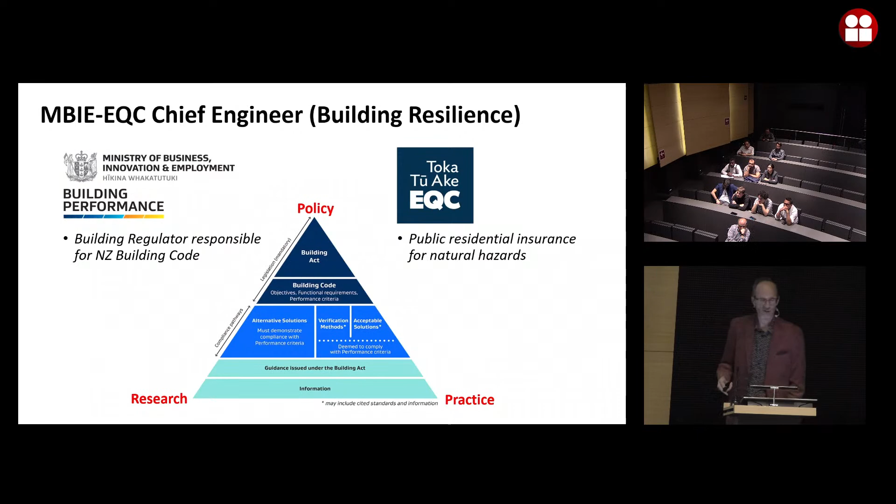In particular, I'm going to talk about the verification method piece—those standards we use all the time as engineers—and where I see those going in the future, as a way of dreaming about where New Zealand might go. But I must emphasize these are just the crazy musings of a professor, not New Zealand government policy. Might be someday, but at current time these are just my ideas I want to share with you.

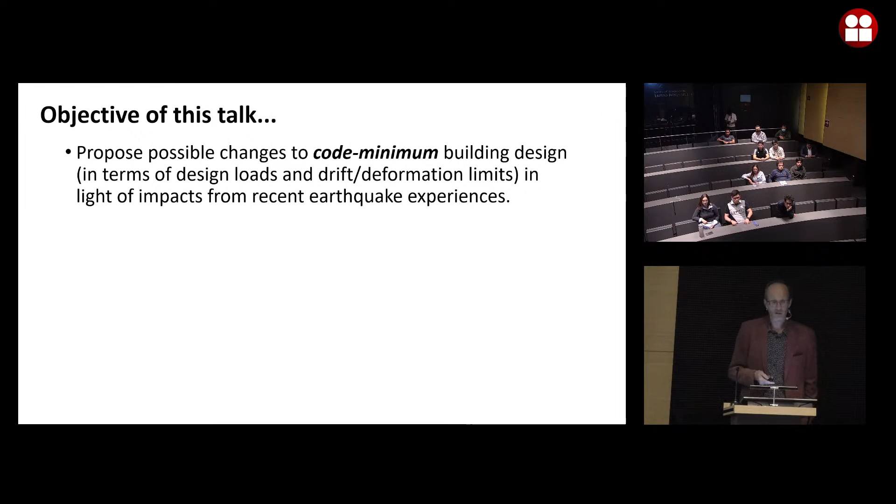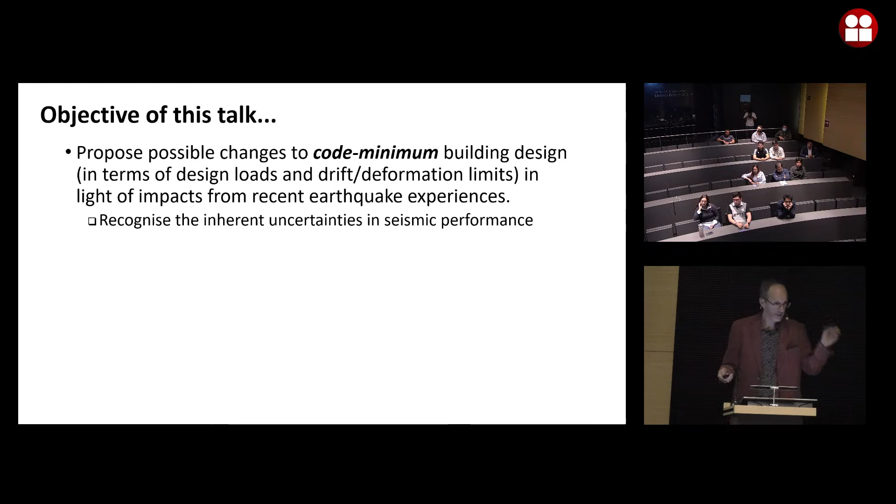In developing these possible changes, I want to make sure we think about a few things. First, we need to recognize the inherent uncertainties in seismic performance—uncertainties in the earthquake, uncertainties in the performance of the building, uncertainties in our ability to predict that performance. That's going to be a critical thread I want to draw throughout this.

Even though those uncertainties make it complex, I want the implementation to be as simple as possible. Otherwise, it's not going to get into the code, right? So I want it to be as simple as possible, but no simpler, because we're dealing with a complex phenomenon of the performance of buildings to earthquakes. We need to recognize that, so you need to make that balance.

And I want this to actually be a relatively small increment of change. You might say to me, well, you have an opportunity to dream big—why are you making it small? Well, I think a small increment of change has the greatest chance of actually being implemented, right?

And so if we can still have positive impact and significant impact, but with a small increment of change in how we design buildings, that to me is going to be a strong argument for the change. And finally, I want to demonstrate to you that I think many modern buildings today are already repairable after a design level earthquake. I'll try to demonstrate this with a couple of case studies. But if this is true, that really gets us a long way to saying, yes, we can design repairable buildings.

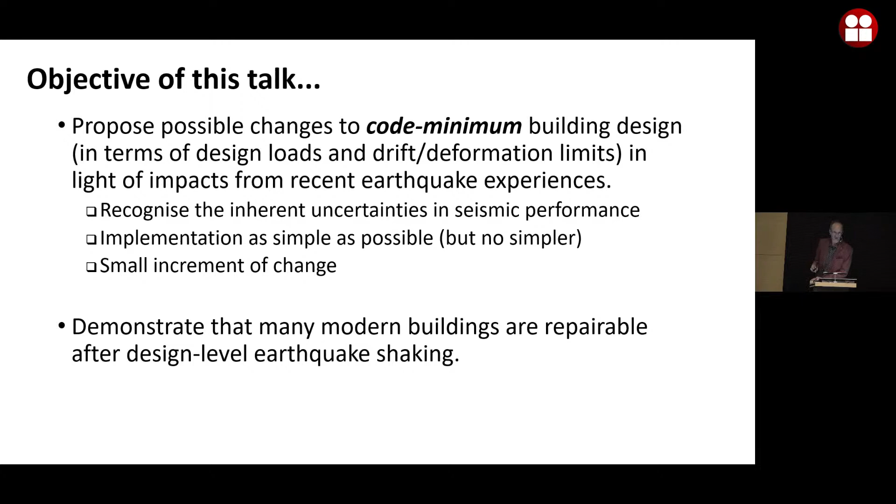So first, let's think about what I'm going to call the building design improvement cycle. In the good old days, this would essentially be triggered by an earthquake happening, and then we go out and look at the performance of these buildings, probably spending most of our time focused on the structure. Non-structural elements may be damaged, but our focus was on the structure. A lot of this learning, by the way, came through the EERI program, Learning from Earthquakes.

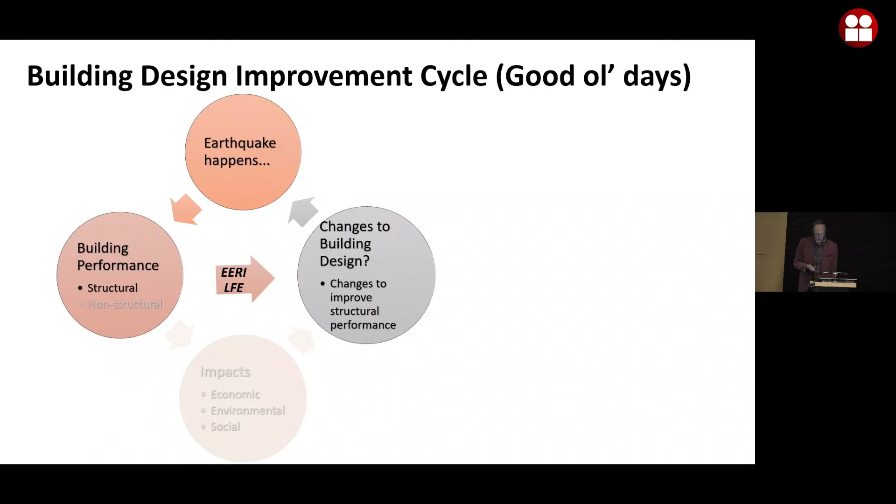So hats off to that program for all the learning that has gone on. And after Learning from Earthquakes reports back, we ask ourselves, okay, what sort of changes do we need to make in the design of our buildings to improve that structural performance that we've observed? And it's really out of that process that our ductility-based design principles of today were born. A lot of these were embodied in the key document ATC3, which is really the foundation of most modern seismic design codes around the world.

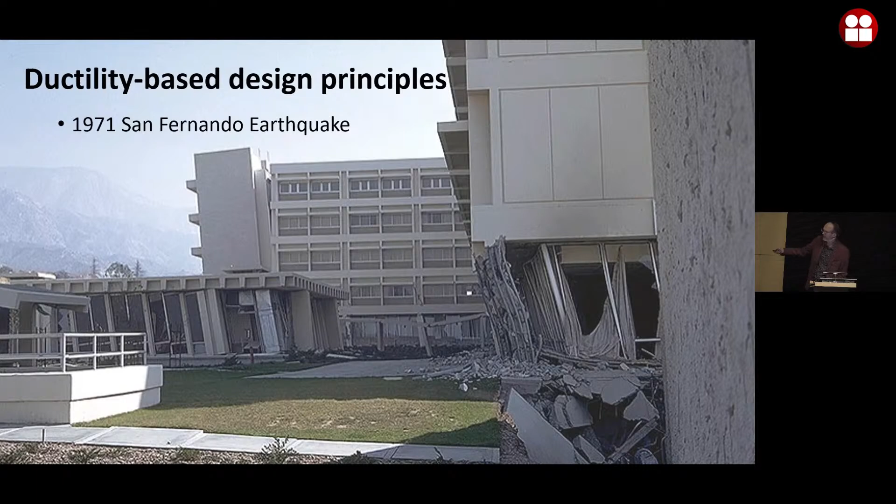And I think the poster child for this was the San Fernando earthquake that affected the Los Angeles area. This, of course, being Olive View Hospital, which opened just shortly before the earthquake. And one looks at damage like this and says, oh, look at that soft story. Wouldn't it have been great if we could have spread that inelasticity up the building? Also look at the damage to the columns and say, oh, we can actually design for deformation capacity if we confine those columns versus leaving them unconfined like the one on the left.

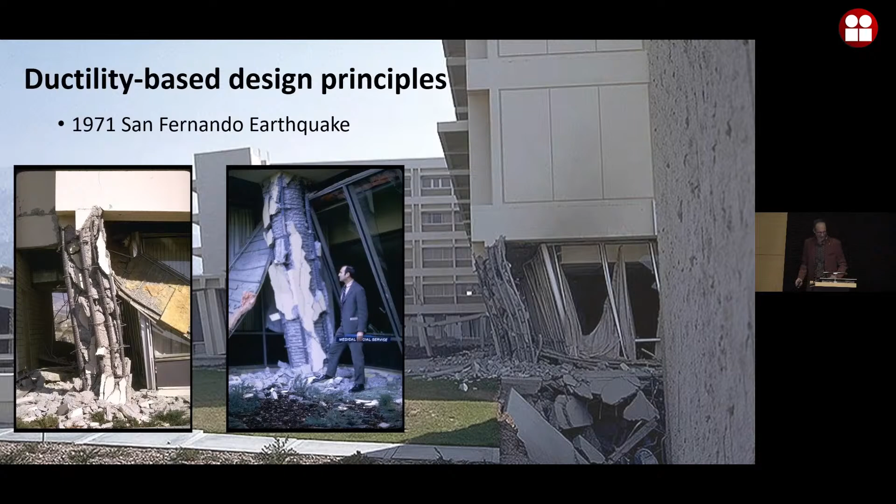It also shows us how health and safety has changed over the years. We wouldn't be approaching a building like that in such condition today. Well, nowadays, I think we recognize that things are a little bit more complex.

And so our building design improvement cycle needs to expand a bit, right? We look at the performance and we need to consider the performance of the non-structural system. And really what becomes important are the bigger impacts. I'm going to classify these into economic, environmental, and social. And I'll come back to those classifications in a second.

And again, EERI LFE has been central to this thought process. But what we asked ourselves afterwards, instead of how can we change the structural performance, we asked ourselves, what changes are necessary to manage future impacts from future earthquakes? So essentially, this is the process I want to go through a little bit here today. To start off with, let's talk a little bit about what impacts have been observed from recent events. And then we'll talk about what possible design changes we might make to manage those impacts. Notice I say manage, not eliminate, because eliminate would probably be unachievable in most cases, but manage.

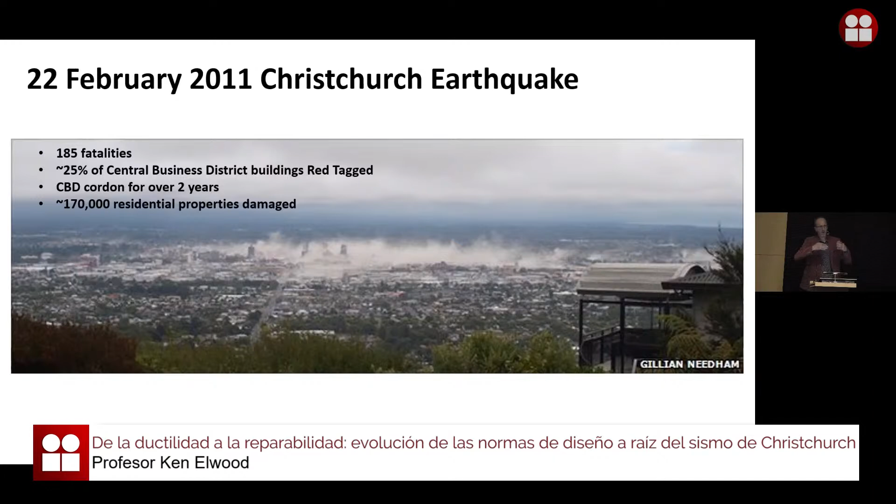So this is a city of 400,000 - it's a small town. So that impact on the residential properties is massive, considering the size of the city. But what I want to focus on are more the indirect impacts, the wider impacts.

I'd like to classify these as being economic, environmental, or social. All of these are different impacts, and some examples are shown here. Building performance has some relationship with all of these - some more than others, but some.

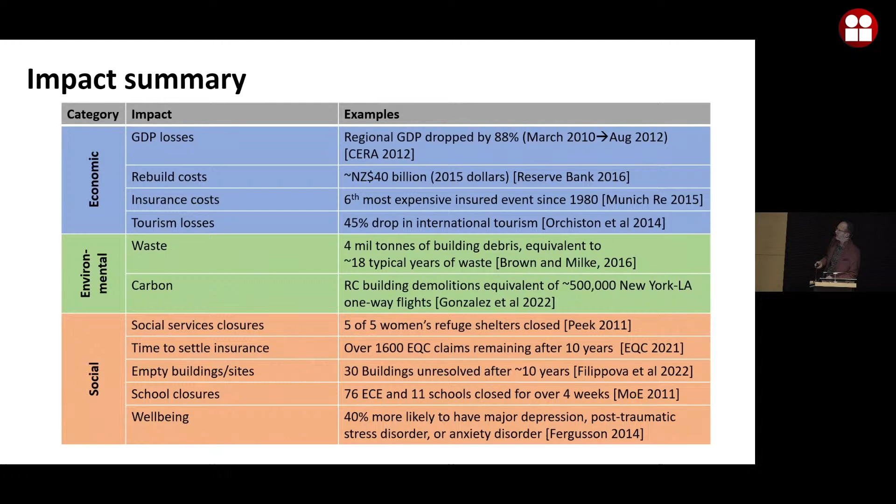Instead of reading through these, I'm going to just pull out a few to show you in a little bit more detail on the subsequent slides. So first, let's look at economic.

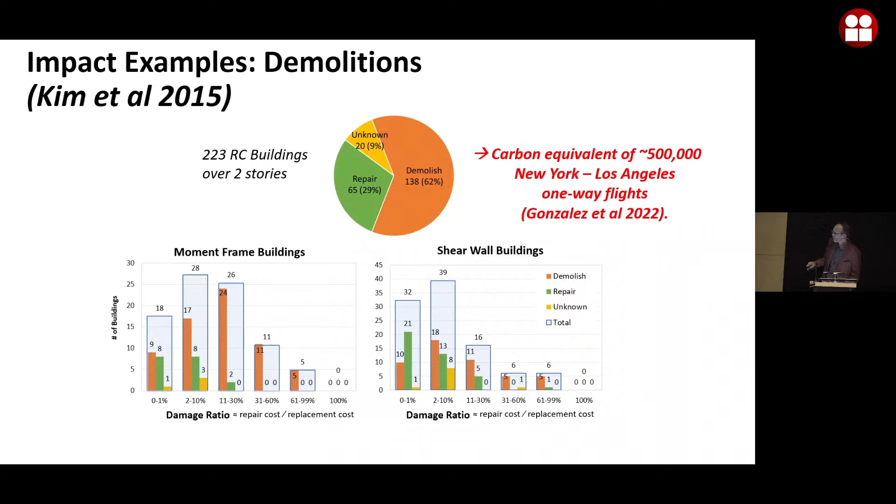Well, actually, the decisions around these demolitions is quite complex. This was a master's student of mine who thought through what are the different things influencing the outcomes on these buildings. Essentially, it's influenced not only by the earthquake itself, but the condition of the building prior to the earthquake, the economics of the building for the owner prior to the earthquake, and then the condition of the overall neighborhood after the earthquake, and whether or not the owner really wanted to be back in that area, whether you were in a cordon or not, and that either made it easier or harder to rebuild.

And then you go into what I call this vortex of complexity. There's lots of stuff going on here, and I could give you a whole other hour lecture just on these factors. But a really important piece in New Zealand was insurance. New Zealand is heavily insured. The vast majority of these buildings that were demolished in Christchurch had good insurance, and that may have contributed to that decision to demolish. But like I said, that's a whole other hour lecture.

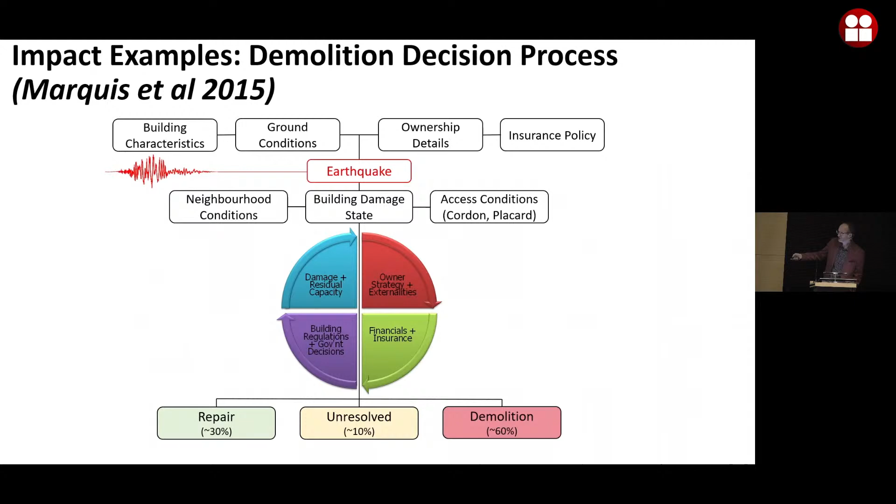What I want to emphasize here is, in addition to this large number of demolitions, we still have a good number of unresolved cases. In fact, 5 years after the earthquake, the local newspaper identified what they called 45 barrier sites. These were sites that were barriers to the development, to the redevelopment, the revitalization of the city.

And speaking of social impacts, there was a very interesting survey done for the years following the earthquake, where they asked people to reflect on what was impacting their everyday lives. They gave them a whole list of questions: does this impact your life? And rated this as a slight, moderate, or major negative impact, or none at all.

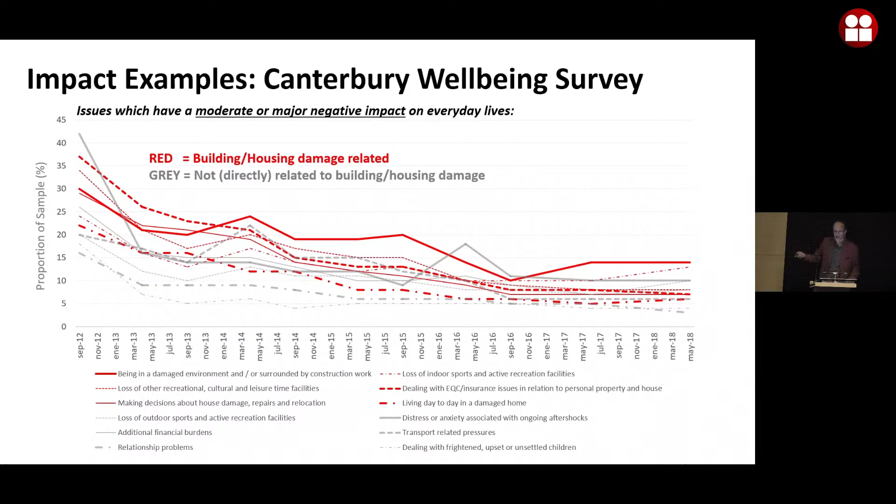Another form of well-being impact were the widespread injuries. We often think about, in design, we think about life safety, right? But actually, injuries are also a direct impact of the earthquake and impact people's lives and kind of ongoing well-being issues for the community. So this was a study done by Horspool where they collected a really amazing data set on injuries after the earthquake.

And from all different sources, you can see that some of these are just moderate and can be dealt with at a community clinic, but many of them are serious or critical cases. Those serious or critical cases tended to be concentrated, of course, in structural impacts. So this reinforces the fact that we need to focus our efforts on the structural performance to protect people against those serious injuries. But very widespread moderate injuries across a lot of different causes.

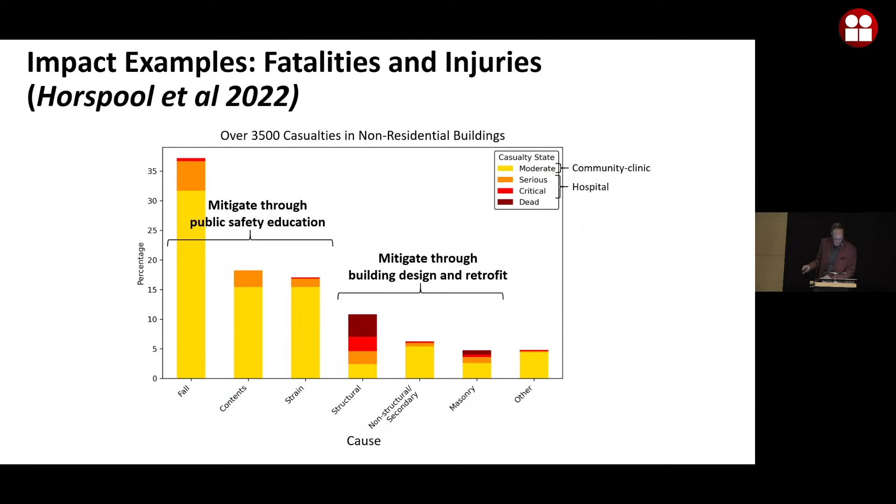I've just tried to give you a snapshot of these various different impacts, and I've shown you that they're complex. It's never from just one thing. So just showing you some examples here and what are sort of the contributing factors to that impact. While there are many contributing factors, building damage does play a role in each and every one. And so now at this point, I want to change gears and focus on how we might manage that building damage and then how that could help improve or manage, in turn, the impacts.

So to do this, let me turn to the New Zealand Building Code. I'm putting this in the context of the New Zealand Building Code, but it could very well be done according to any jurisdiction, which would have similar provisions. The most common of these provisions, and that appears ubiquitous around the world, is to protect people from harm, from injury. And in the case here, it says injury and not fatality. That's because it's intended to protect people from injury, both fatal and non-fatal.

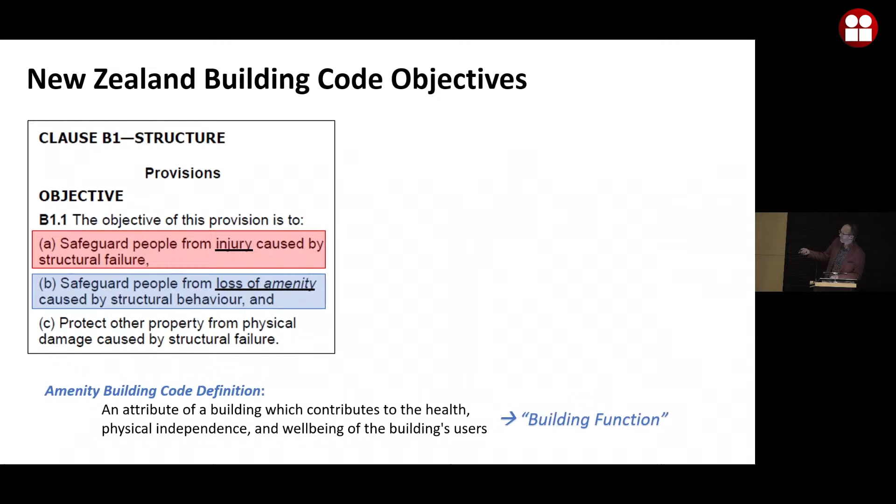Now, in New Zealand, we try to achieve these objectives through design targets, where we design for an ultimate limit state and a serviceability limit state. That ultimate limit state is probably what you're used to designing for here. In the case of New Zealand, this is designing for a 1 in 500 year ground shaking.

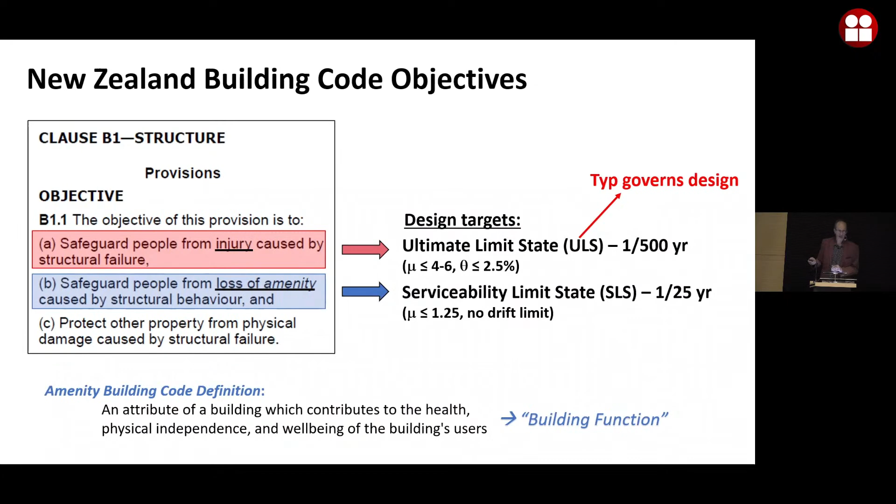For serviceability limit state, it's a much lower ground motion, only a 1 in 25 year ground motion. So that's a pretty small earthquake. We'll come back and talk about whether these are appropriate in a moment. While you have these two, the ULS, ultimate limit state, really governs the design of most buildings. The serviceability limit state has limited impact on most ordinary buildings. The only thing it does to a large degree is control the amount of ductility we're allowed to consider in our design.

So how do we relate these design targets and objectives with the impacts we were talking about? On the left side, I'm showing the impacts from the Christchurch earthquake, and at the top, the building code objectives. It's these design targets of SLS that give us the amenity and protect against some of the damage seen. Then we've got ULS protecting from injury and fatality, protecting against big losses, serious injuries and fatalities. But there seems to be a gap here.

These issues around waste, carbon costs, empty buildings are really not addressed. That suggests maybe we need another building code objective, something related to a climate change related objective. I'm going to suggest that maybe that is an objective around enabling repair. So for the rest of the talk, I'll go through each of these three and try to suggest ways in which we can assess how we design for each of these design targets, including enabling repair.

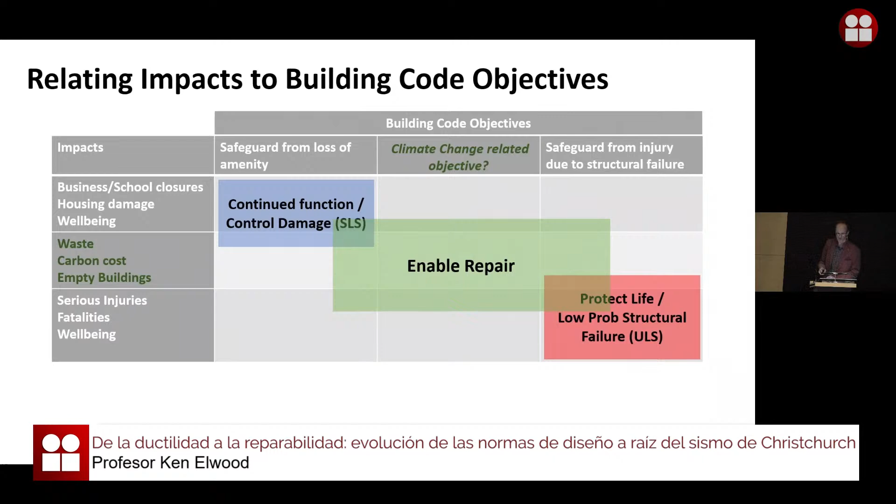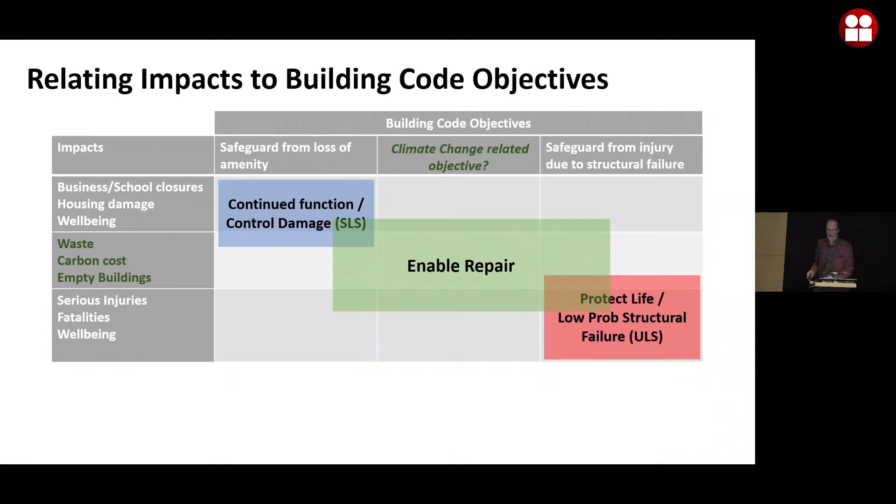I'm going to start at the most familiar space, the ULS, then go up to talk about SLS, and end with enabling repair. I'm going to focus on what design loads and drift limits or deformation limits we might need for each of these. But again, there are lots of other aspects of the design process that are as critical, if not more, than these particular limits. But this is a start.

Before I do, I want to talk a little bit about risk-targeted concepts, because I'll use this concept a few times in the next several slides. The traditional approach is that seismologists give us a hazard curve for our location, and this tells us the level of shaking for different probabilities.

Typically in New Zealand, we use 1 in 500 as our annual exceedance probability. So you read across at 1 in 500, and that gives you your design SA. But what if you have another location with a different hazard curve, but the same value at 1 in 500? Do you still use that same design SA? Is that appropriate? Are we missing something about the rest of the curve? Maybe we should consider that.

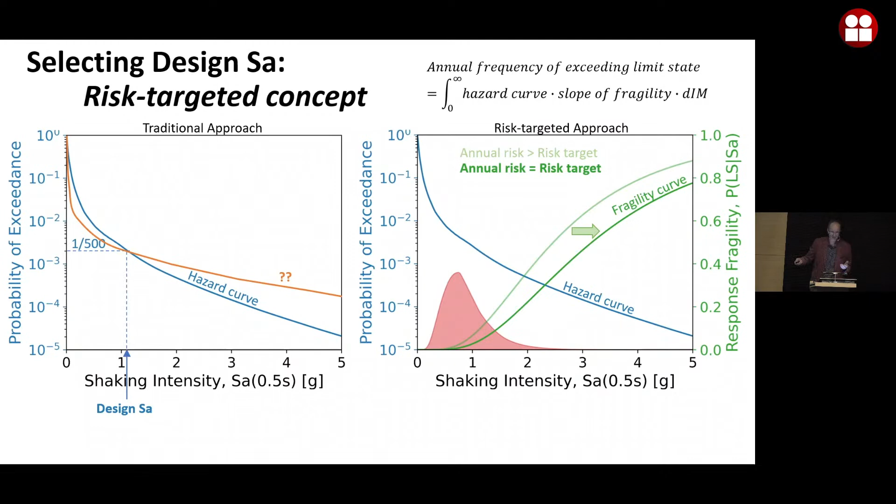Now the question is, what value do you design for? You don't design for the fragility curve, you have to design for a particular value. Here in the US, it's traditional to say you design for the 10% value, and that gives you your SA to design for.

Equivalent to that, you could say we believe we have some collapse margin ratio for our buildings, a ratio between the median value on that fragility and the value I design at. So I can read from that median value back to the design value, and that's the value I choose and put into the standard and design for. So this is the basic risk-targeted concept, and it's implemented in the U.S. in ASCE 7 to get their risk-targeted MCE values. We're considering this concept in New Zealand, but taking a slightly different approach.

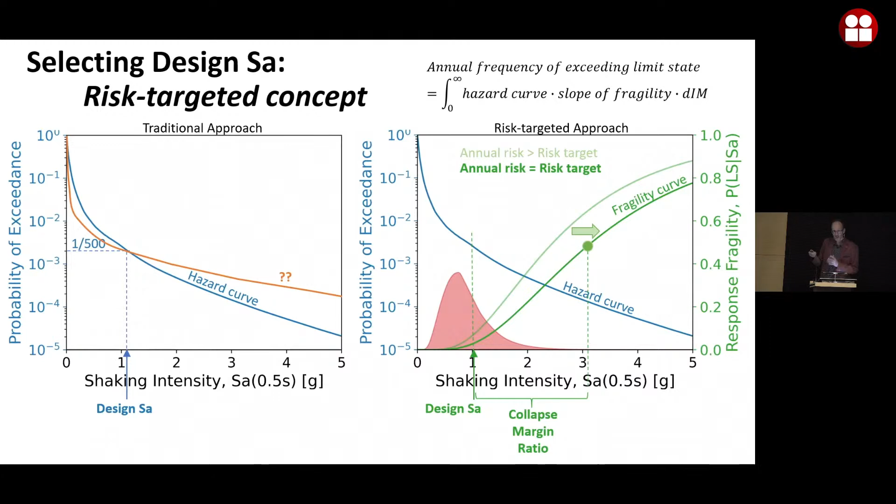First of all, we ask ourselves, do we really have a single risk target? Defining what is tolerable or acceptable risk is incredibly difficult because it's a societal tolerance. So really we can only define a range if we're lucky. And the risk we're really interested in is protecting life.

So we define an annual individual fatality risk of somewhere between 10 to the minus 6 and 10 to the minus 5. That translates to collapse risks up to about 0.5% in 50 years, which is considerably smaller than what's used in the IBC in the US. But in the New Zealand context, this feels honestly too high. It doesn't really feel like an acceptable collapse risk here.

Using this fatality risk has the advantage that we can compare it to other life risks. This table shows life risk thresholds used in different sectors in New Zealand, largely from land use planning. The first thing you see is there's no clear boundary—it varies all over the place. These are different sectors that each have their own tolerance levels identified.

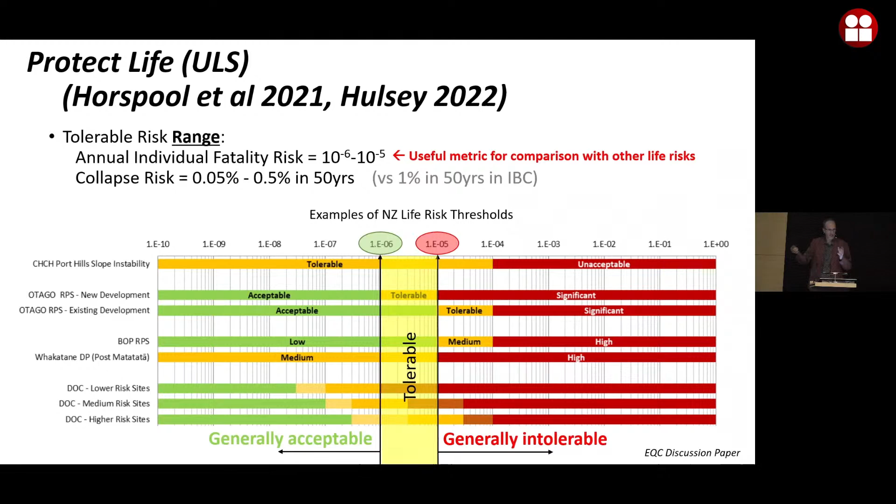But if you look at these, particularly those for new development, we tend to see a tolerable range, where below that range is generally acceptable and above it is intolerable. So maybe this is where we expect our building code to fall, to define that tolerable range. This is how we chose 10 to the minus 5 and 10 to the minus 6—by looking at what values are used elsewhere.

And then we went back to the process I described earlier and asked: what if we take that 1 in 500 year hazard and consider the range of possible fragility curves that could result from a new building designed according to our code? It's not just one fragility, it's a range. When we consider that range and apply the 1 in 500 year hazard, we get this distribution of risk.

It's a different distribution of risk depending on where you are—this shows four cities in New Zealand. It also depends on site class and building period, but I'm just showing one example here. If I overlay the tolerable range from the previous slide, you see that we actually tend to fall within that tolerable range. So we concluded the 1 in 500 still seems to work fine for us.

We've used a risk-informed approach now rather than a risk-targeted approach—using risk to inform our decision that 1 in 500 is our design ground motion for life safety. So that's all about life safety, about protecting life. Now let's move to SLS, the serviceability limit state, and talk about protecting function, maintaining function.

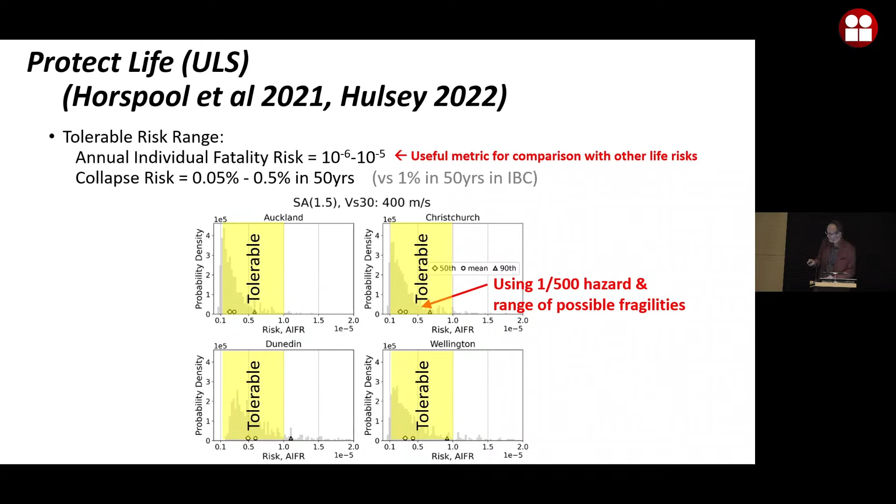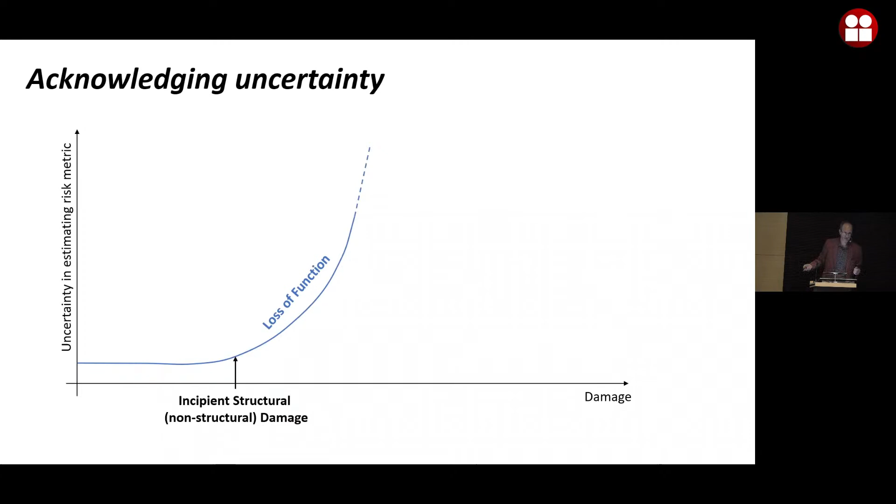So we don't necessarily want to directly target loss of function because there's all kinds of uncertainty involved. Instead, we're going to target incipient damage. I'll start by talking about structural damage, and then non-structural damage. We're going to use incipient damage as a surrogate for high confidence in continued function. We're not actually estimating whether function continues, but using incipient damage gives us confidence that we'll still be able to continue function.

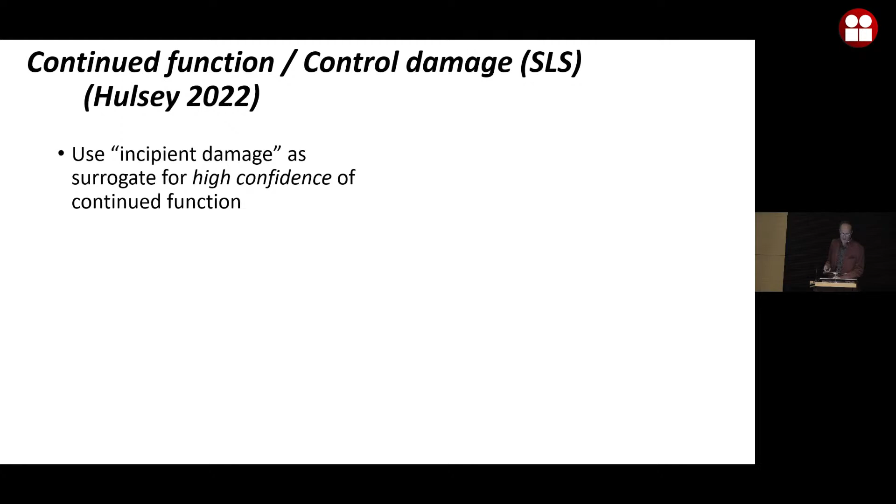We're going to define that based on remaining essentially elastic, so a ductility of less than 1.25. And we're going to choose a risk target of 50% probability of exceeding that in 50 years. You say 50%, that's pretty high. But we are just talking about damage, not life safety in this case. If we get it wrong, we get a little bit more damage, that's not the end of the world. So maybe using a 50% value is okay, but we could revisit that. If you didn't like 50, we could put something else in there.

So we do the same process as before, but now we have a fragility that represents essentially elastic. Again, we can integrate these two and see, oh, actually, that annual risk is too high. And we can shift that fragility over and find until that risk gets down to our target level. And then we can read off the design value for that serviceability limit state.

It turns out that happens to be about a 1 in 500 year ground motion. Sorry, 1 in 50 year ground motion. Remember before, our current standard uses a 1 in 25 year ground motion. So this is quite a bit more rare, a bit bigger event. But this number actually tends to hold regardless of the location in New Zealand, so that's convenient. We can just design for that 1 in 50 ground motion.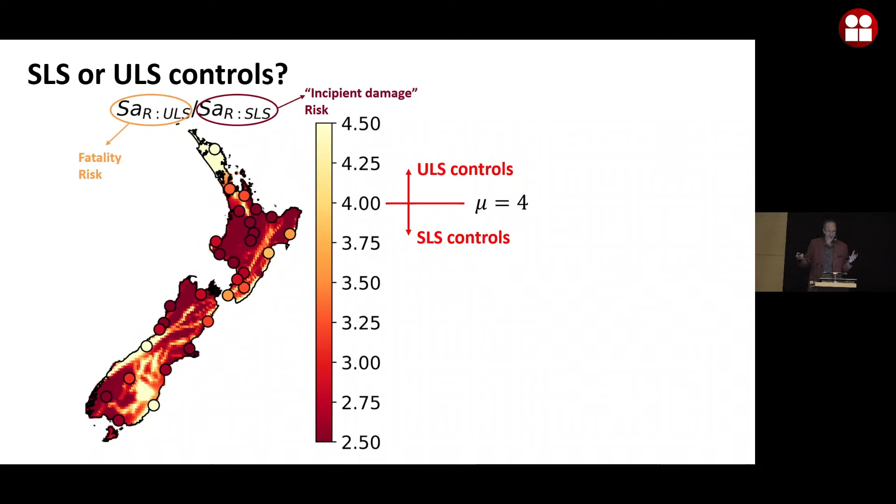And that's quite different than what we have right now. Remember I said that the ULS, the ultimate, typically governs. But this is actually consistent with where the industry seems to be going. There's been a lot of talk at recent conferences in New Zealand about the need to consider designing at service level and checking performance at ultimate, that this would maybe deal with some of the issues from Christchurch. So this study has sort of supported that outcome. And it's interesting now to reflect on other countries' experiences. Here I want to reflect on Japan, because in Japan, they do design for essentially a service level and then check for ultimate. Whereas in New Zealand, we design for the ULS currently and check SLS.

So I'm comparing two earthquakes here. The black one was Christchurch. The red one is the Kumamoto earthquake in Japan in 2016. You can see it's quite a considerably strong earthquake, larger than Christchurch in most cases. But if you look over here on the right-hand side, the red ones is all Kumamoto, and you can see most of them have no damage at all.

And sorry, these are all the modern, what I'm calling modern concrete buildings, so past the code where capacity design and things like that were implemented into the code. And while the buildings in Christchurch, sure, they met life safety, we saw very few in the severe and collapse categories. We did see a lot here in the damaged category. So there's something suggesting that the approach in Japan maybe is contributing to these better outcomes.

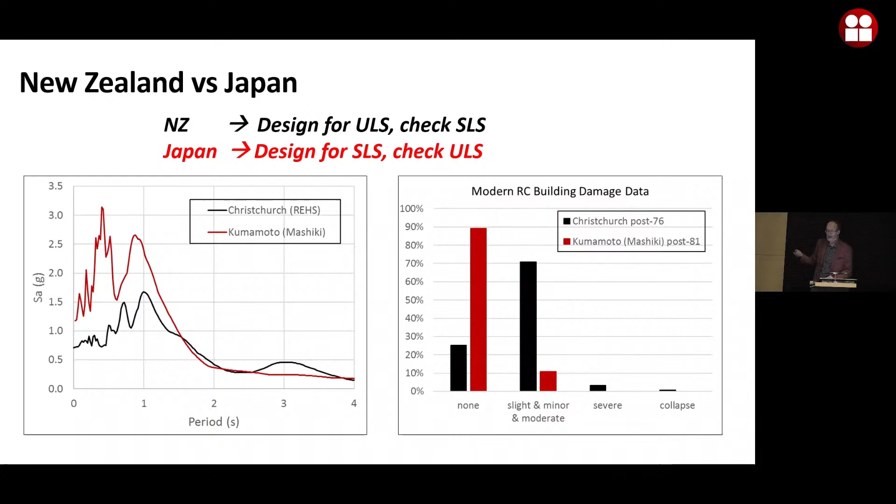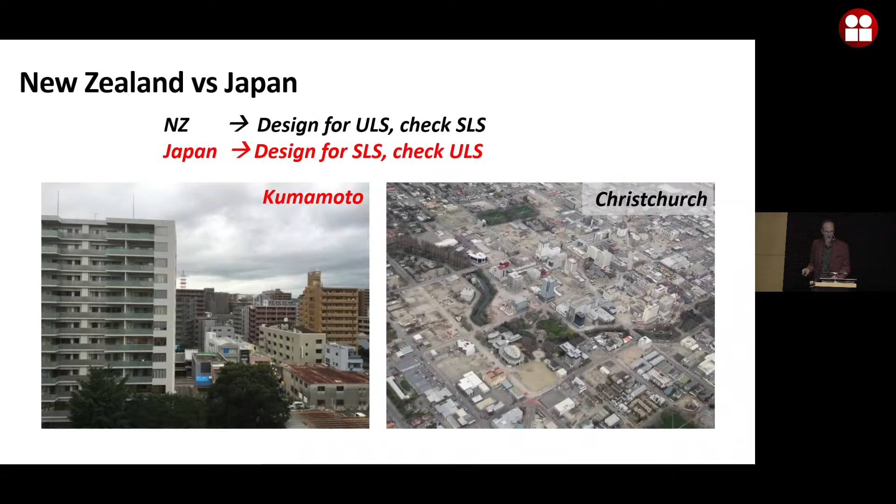Since this picture was taken, many of the buildings in this picture have subsequently been demolished. So a big difference in terms of outcomes. Is it all because of this? Surely not, there's more to it than that. But it seems to suggest that this change in approach might help us in changing the outcomes.

All we've been talking about so far is strength. And in the words of Hardy Cross, professor from the University of Illinois, strength is essential but otherwise unimportant. What really matters is drift. So now let's think about this continued function aspect, but in terms of the drift.

What sort of drift limits should we apply for drift-sensitive non-structural components to enable continued function? To do this, I'm going to consider partition walls, and I could use different damage states. I'm going to use DS2, essentially the damage state at which you'd really start to do repairs. Damage state 1 isn't too bad—many of us have partitions in our homes with a little messiness, so you probably wouldn't even do anything with a DS1. So DS2 you would surely repair.

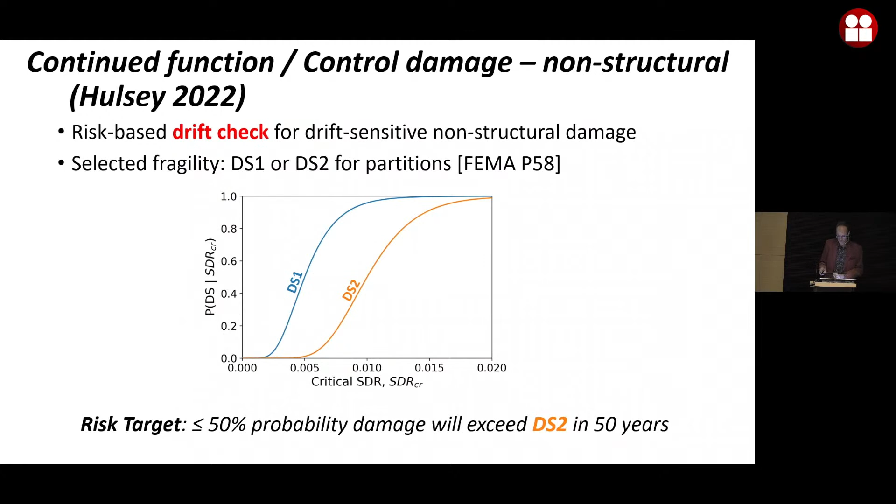So we want to set a risk target for this, and again I'm going to use that 50% limit—50% probability of damage exceeding a DS2 in 50 years. And how do we do this? Well, we now need something in terms of drift, not acceleration. But typically our hazard curves are given to us in terms of acceleration, so we need to convert that.

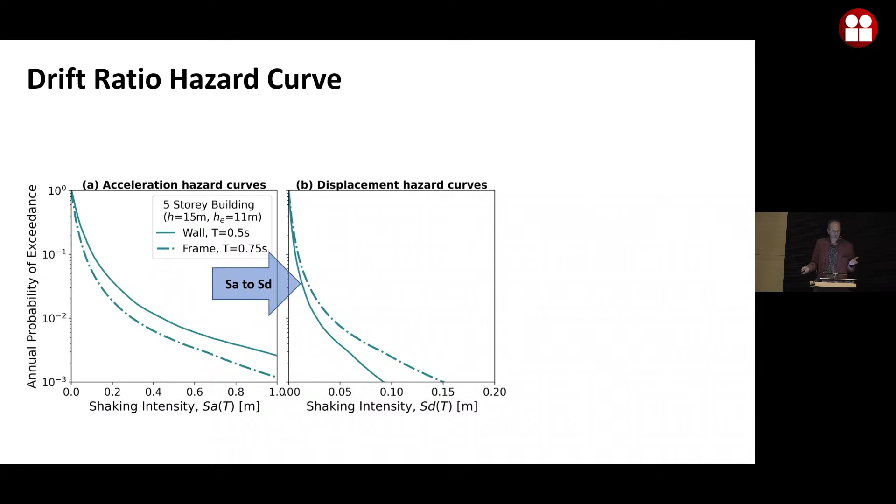It's easy enough to convert SA to SD, spectral displacement. Then we need to convert that spectral displacement to an interstory drift, a maximum story drift over the height of the building, by assuming a deflected profile based on whether it's a wall building or a frame building. But that's easy enough—we can convert those hazard curves into drift hazard curves. And then we need to integrate that drift hazard curve with the partition fragility.

And the first time we do that, we end up getting a higher risk than we wanted, so we got to do something about that. But we can't change the partition fragility—it is what it is, unless you choose a low damage partition. But I want to just use your run-of-the-mill partition; I don't want to pay for a special one. So maybe I need to stiffen my structure to reduce the drifts. You can do that, but that's going to shift your hazard curve as you stiffen the structure, and you stiffen it until you meet that target.

Well, what this shows us—and we can do this for several locations—is that we consistently end up getting, at the service level ground motion of 50 years, a drift limit of about 0.7%. If we had done this for DS1, we would have gotten 0.3%.

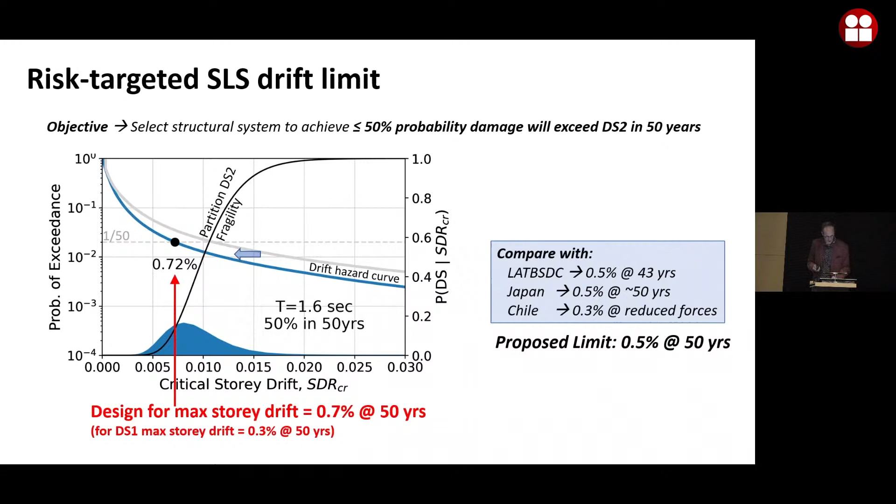So using that as a drift target to control damage to the drift-sensitive non-structural systems. Okay, so now we've got means of dealing with protecting life and structural failure, and means of controlling damage and continuing function. Now let's talk about the really new part, which is enabling repair.

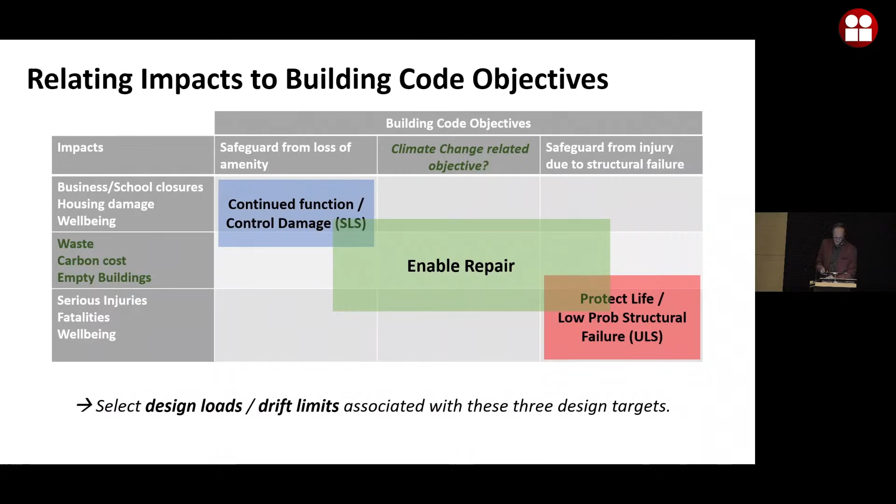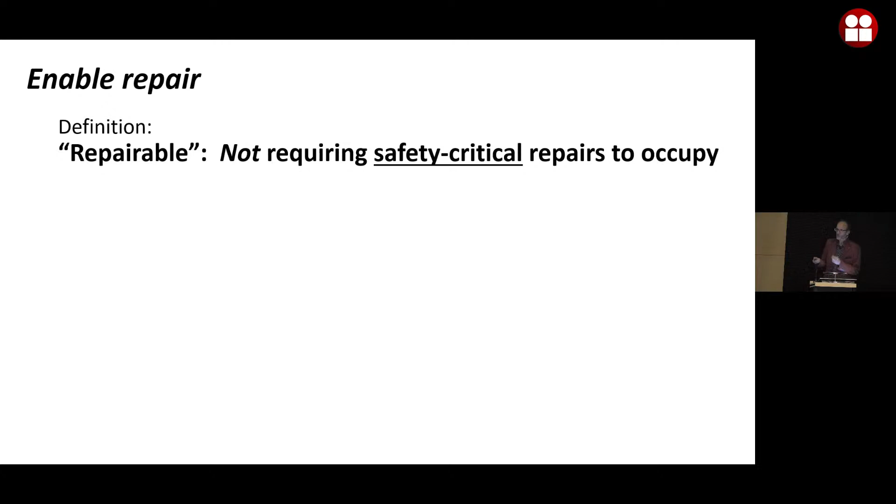To do this, the first thing I need to do is give you a definition, because really anything is repairable if you throw enough money at it. So the definition I'm going to use is that it's not requiring safety critical repairs to occupy the building post-event. What do I mean by safety critical? I mean a safety critical repair is one needed to restore either the strength or the deformation capacity of the building and its components. So that's the definition I'm going to use.

I also want to identify that you can still have a fair bit of damage with this definition, so you're unlikely to be fully functional. But by making sure you don't have any safety critical damage, you'd be safe to shelter in place. And that's why we say it's safe to occupy. That's really critical so people have a place to be, a shelter after an event.

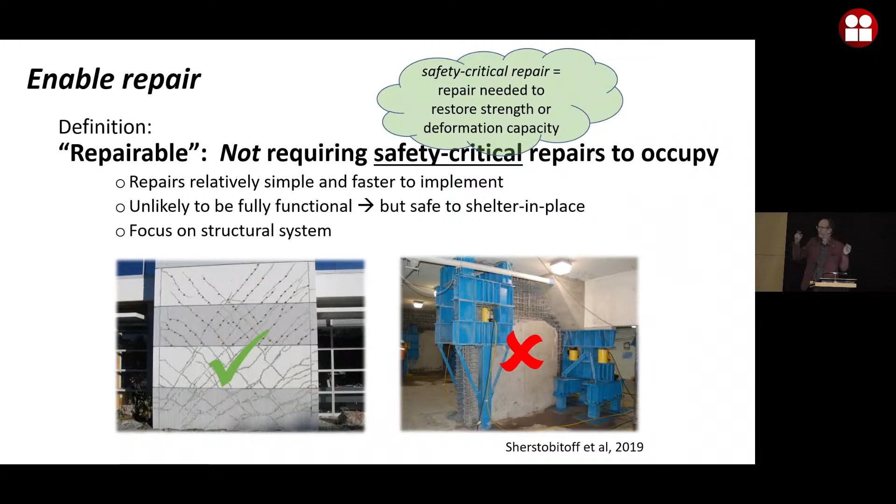I'm going to focus here on the structural system. I'll come back and talk very briefly about non-structural, but there's a whole piece of work that's needed around repairability in non-structural systems.

So to do this, I want to propose some component-based repairability limits—repairability limits for our components: our beams, our walls, our columns.

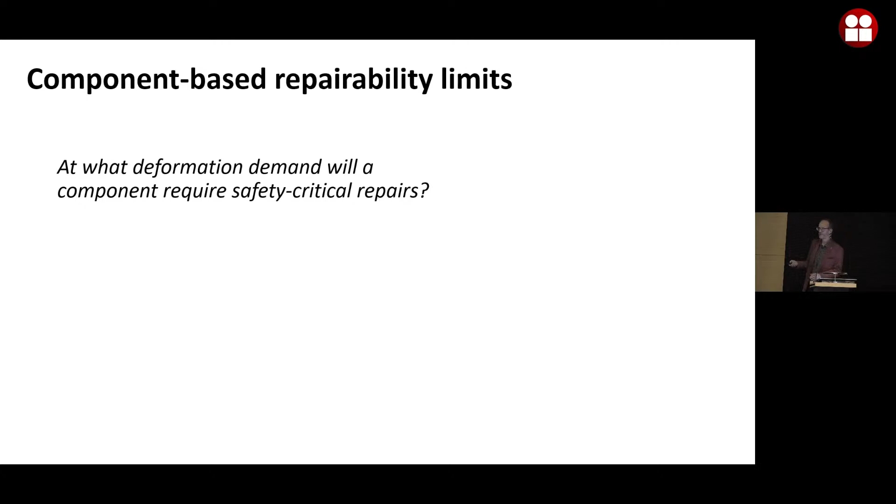So essentially I'm asking myself, at what deformation demand will a component require a safety critical repair? Or, put another way, when do the prior cycles from that damaging earthquake influence the strength or deformation capacity of the component? With these questions in mind, let's look at some test data.

For me, that's the first place to go to think about any of these things. There was a great set of tests done by Kawashima and Koyama back in the 1980s, where they constructed identical bridge columns and subjected them to different loading protocols.

One loading protocol had 10 cycles at each drift level, and the other had 3 cycles at each drift level. What you see is that up until you reach about the peak in the response, the two were very, very similar—even in their damage pattern.

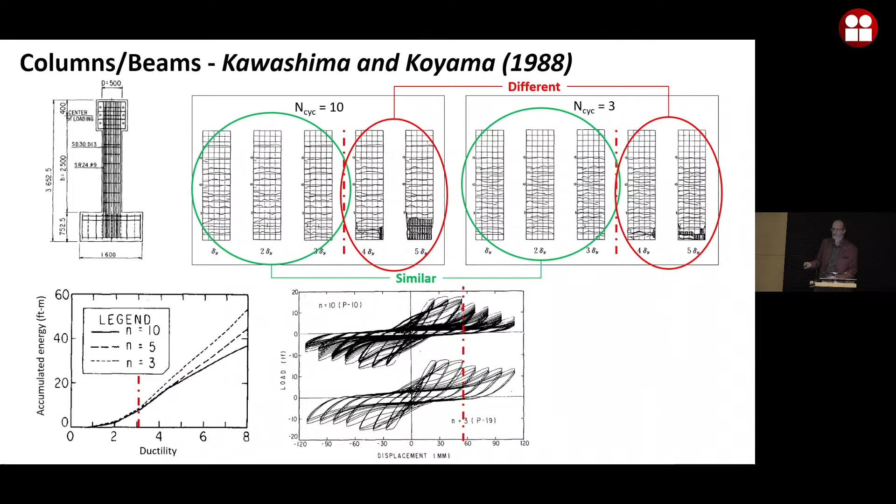But once we got past that peak, things started to get different in the damage pattern, and it dropped off more quickly with the 10 cycles. Really, the number of cycles up until that peak did not influence the performance we were seeing. So the number of cycles prior to the peak didn't matter to the performance afterwards.

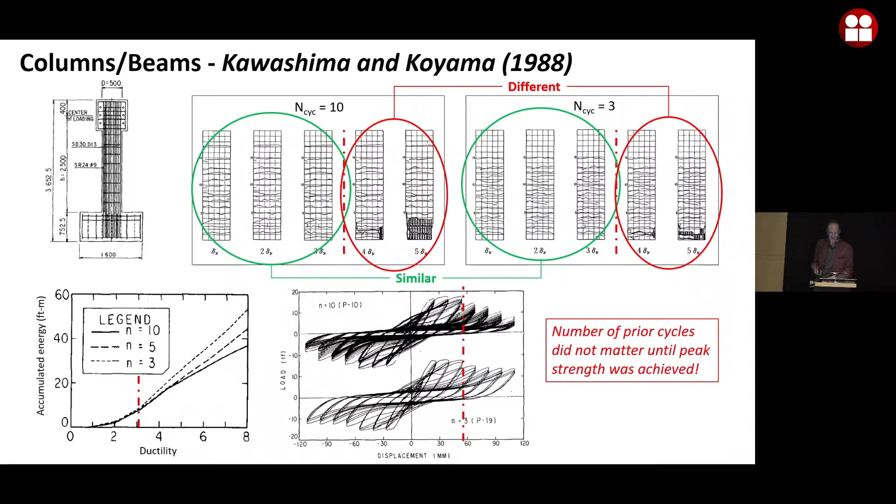How about walls? I had a graduate student at the University of Auckland who wanted to explore this for walls, so he did a few tests—one where he applied a standard cyclic protocol, and another where he first put it through an earthquake recorded in Chile, which had lots of cycles, and then put it through that standard cyclic protocol.

Essentially, the peak in the response, or the onset of bar buckling, was unaffected by the input of that prior earthquake. So the number of prior cycles did not matter until bar buckling—essentially the peak strength—was achieved.

Then, of course, my student wanted to prove me wrong and decided to do a test with 10 big cycles at 1.5% prior to the standard cyclic protocol. That resulted in a bit of a change and some degradation at an earlier drift. But this simply emphasizes the uncertainty in the outcome and the need to account for those uncertainties in our process. Also recognize this is a lot of cycles at 1.5%, a pretty large drift for a wall.

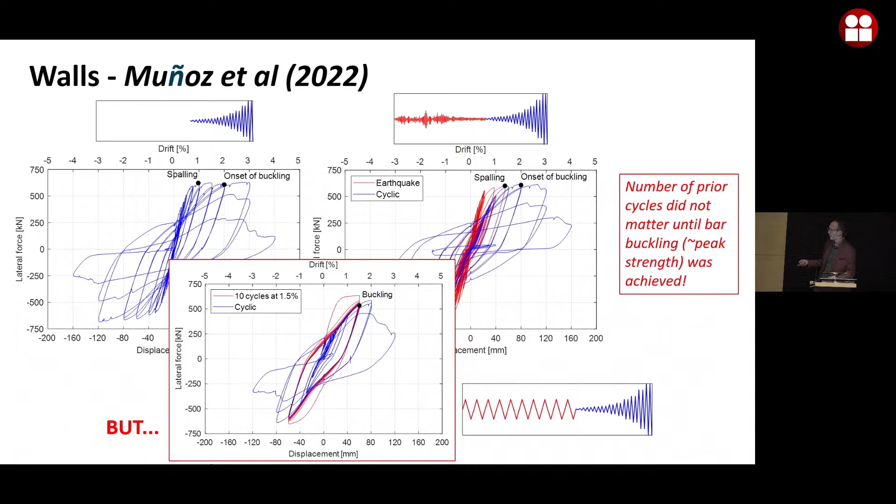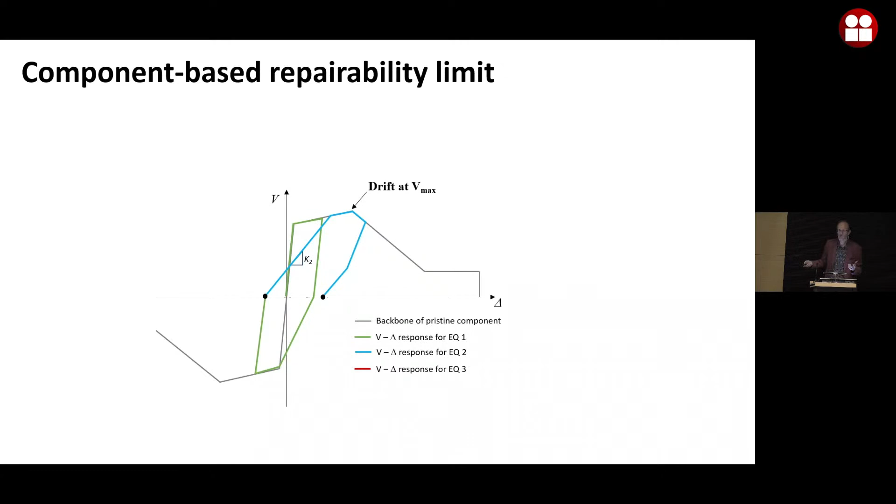So this tends to suggest that maybe we can define a repairability limit. If this represents the backbone of a component, and that component experiences an earthquake—the first earthquake—maybe the response is shown in green, and it doesn't go past the peak quite yet. Then that same component experiences another earthquake that pushes it past the peak. But that green one hasn't really influenced the response except that it's decreased my stiffness—my strength and deformation capacity has remained the same even though I had that green earthquake before.

And this poor unlucky building has another earthquake that pushes it again. Because the blue one pushed it past the peak, surely I've lost some strength and some deformation capacity from that. So the cycles after the peak are now likely going to influence my strength and deformation capacity—a simple concept that people have pointed to before. But really, what this suggests to me is that if the demand in the damaging earthquake goes beyond delta V max, that is when you need those safety critical repairs. But if it hasn't, then you don't actually need those safety critical repairs. So maybe this drift at V max can be used as our repairability limit.

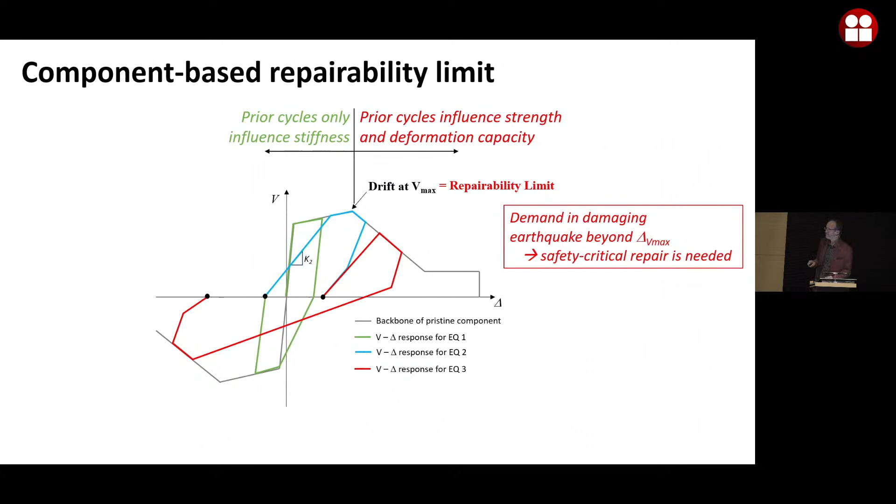Okay, well you might say, hold on a second. You said you've got to reduce stiffness from that first earthquake. Surely that's going to impact performance in subsequent events. And you're putting this poor building through so many cycles. What about low cycle fatigue? Isn't that going to influence performance in future earthquakes?

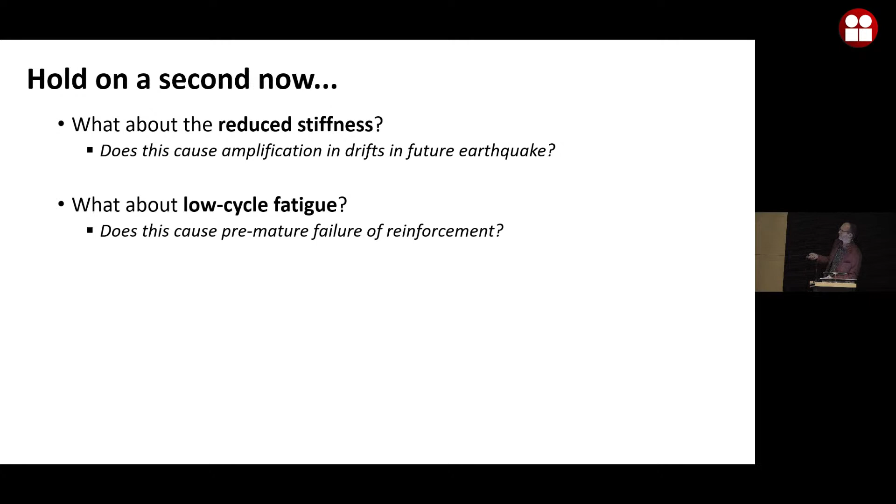All right, so let's take each of these very briefly and I'll try to address them. First, reduced stiffness. I think this is the part in a presentation where you need a video. I think we all need to wake up a little bit, and I tend to do that with shake table test videos. So hopefully this will work.

Oh, no, I don't want to show you that. Sorry, this is difficult to control. I don't know if the person in the room can do it for me. No, it's just going to—because I need to press the button. Can they control it there? Can they control it in the back? Now it's stuck. Just roll the cursor over the video. Sorry, I should have tried this before to make sure it works. I'll describe the video instead. It's not working. Too bad. Well, you'll have to watch me instead.

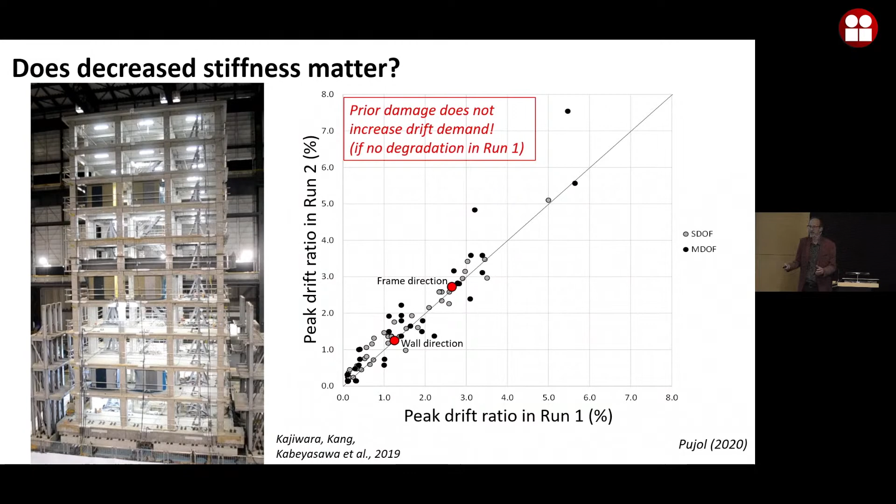And that might be surprising, but actually Santiago Pujol collected data on shake table tests from around the world, both single degree of freedom and multi-degree of freedom systems. You can see that they really follow consistency, that there is limited increase in the drift in the second run relative to the first. The only difference—there are a few cases where you get higher drifts, but in those cases there was degradation in the first run. So as long as you didn't go past the peak, the prior damage did not increase the drift demand, as long as there was no degradation in the first run. Wow, so that reduction in stiffness didn't matter.

How about low cycle fatigue? Well, low cycle fatigue is often explored with cyclic tests on bars.

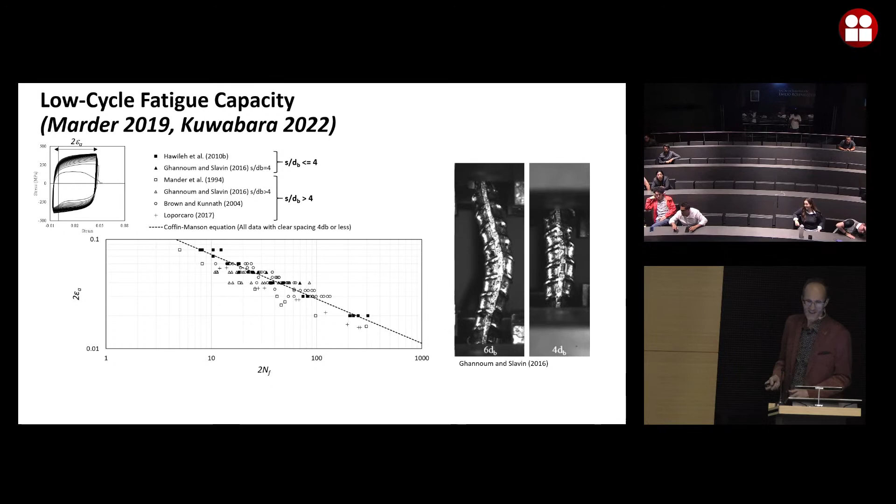Is this a mouse? I don't have any more videos, so—thank you for trying. Yeah, sure.

So these are often done by putting bars in a machine, pulling and cycling back and forth, and you cycle them at the same strain until failure happens. What happens during that test really depends upon the length of bar that's exposed, and you have to get down to about 4 db before you really suppress any bar buckling that happens in these tests. And I'm interested in before bar buckling, because we're looking at the behavior before we reach that peak or bar buckling.

And so if we collect data for cases where S over db was less than or equal to 4, they're sort of up along here. This is relating the strain to the number of cycles to failure. So then you ask yourself, well, what is a reasonable limit on that strain value? And what is a reasonable limit on the number of cycles one might experience in an earthquake?

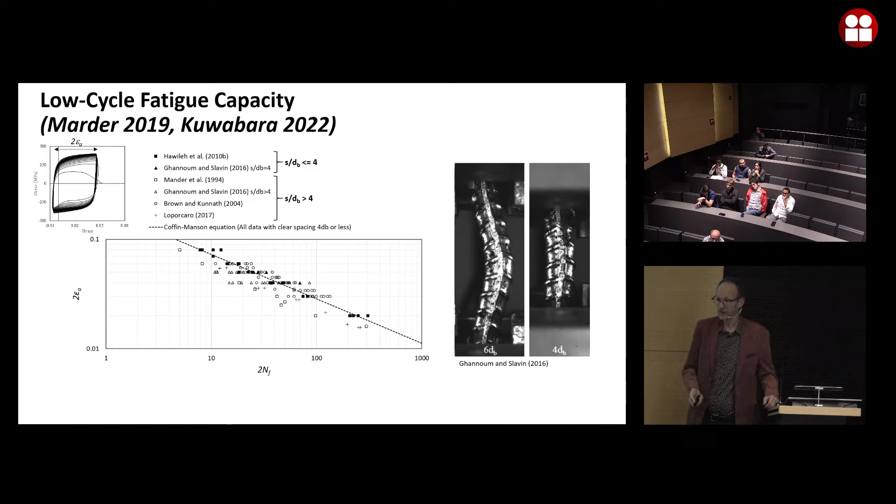On the strain value, I polled a whole bunch of friends who are doing concrete research, and we came up with a number of about 5%. I'd love to discuss this further with Professor Rodriguez and Professor Alcocer, to see what their number might be.

But something like 5% seems about reasonable. Then we looked at the number of cycles that we get out of typical earthquakes, for 2 earthquakes one after the other, because we want this building to be safe in the next earthquake. If we take the mean plus 1 standard deviation of that evaluation, we get about 30 equivalent cycles. Most earthquakes are actually in this box here, which suggests that it's really only up in this far corner where you might start to get low cycle fatigue issues.

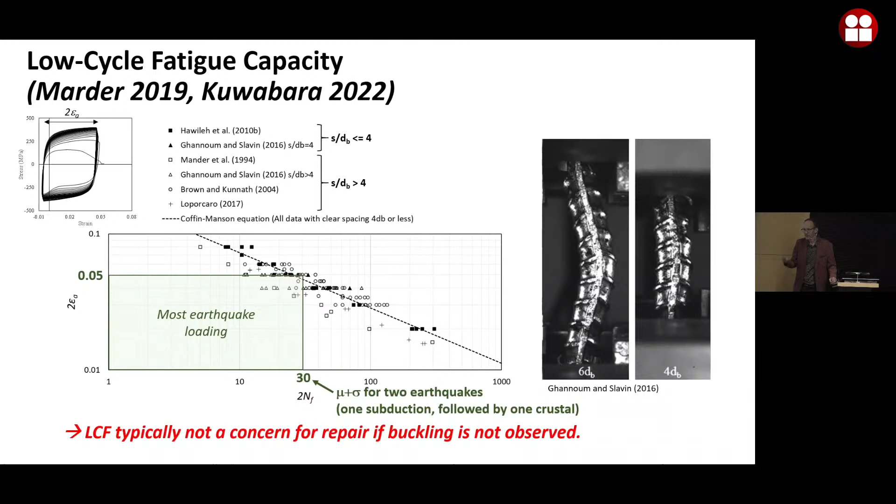So generally what this tells us is that low cycle fatigue is typically not going to be a concern for repair if buckling has not been observed. So with that, we've defined this repairability limit. I'm just going to modify it slightly to say drift at Vmax or bar buckling.

Now let's use that as our repairability limit and see what sort of numbers we get for beams and walls. This was work done by Tayo Opabola, who collected a database of beams; the database of walls was collected by Abdullah and Wallace. This is just showing the deformation at peak drift or at bar buckling for both of them, and you see the scatter that we might expect from tests.

You see that for walls, it's dependent on axial load, which is represented by this lambda parameter. Before I move on, I always like to give us some numbers to hold onto in our minds. So the lower bound for the beams is about 2%, and the lower bound for most of the walls, which have more reasonable axial loads, is about 1.3%. I'll just bear those numbers in mind as we move along.

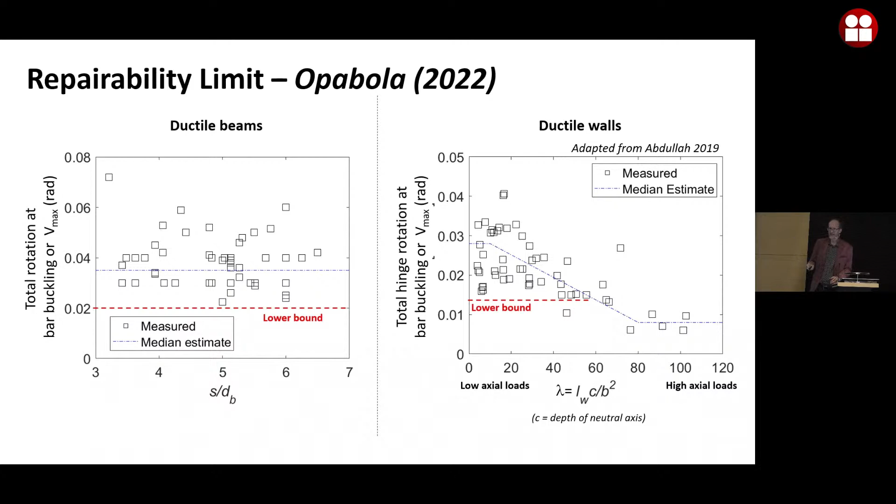But it's not just enough to figure out a repairability limit to put into a standard. We can't just simply think about these test data. We need to think about all of the sources of uncertainty that influence the behavior of the structure. Here I'm looking at the uncertainty in the test data, but also uncertainty in the design and construction of the components, which influences my capacity, and then the influence on the demand side in terms of the modeling and record-to-record variability that might influence the distribution on the demand side.

And then those essentially represent, or can be turned into, these distributions. Effectively what we want to do is shift that demand distribution up to the point that we reach some target probability of exceeding our repairability limit. Once we reach that, that median in demand becomes our limit for our rotation demand. That's the one we pull out and use as our limit.

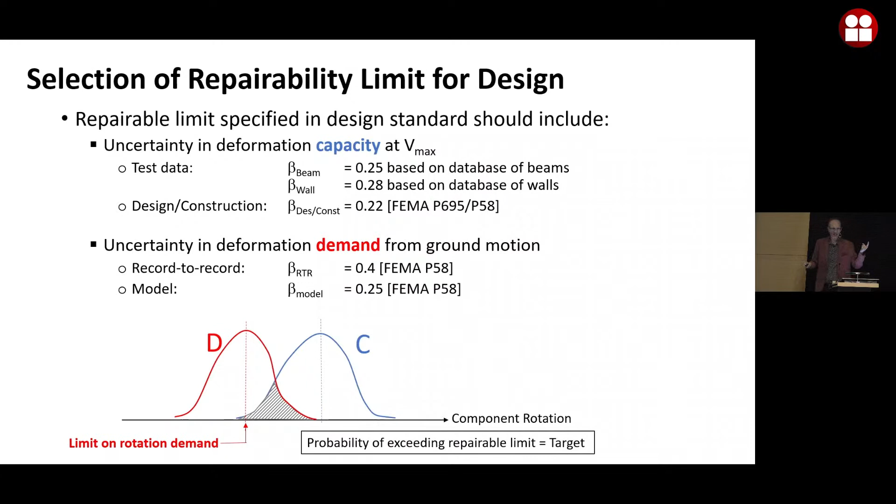Well, there you need that sort of societal expectation of performance, but I'm just going to pick a simple value of 80% - I want an 80% chance, or 80% confidence, that I'm going to be repairable. And what limit is that? Well, it turns out that's the 2% for beams we looked at a moment ago, and 1.3% for a mid-axial load wall. So those provide us with limits for those components.

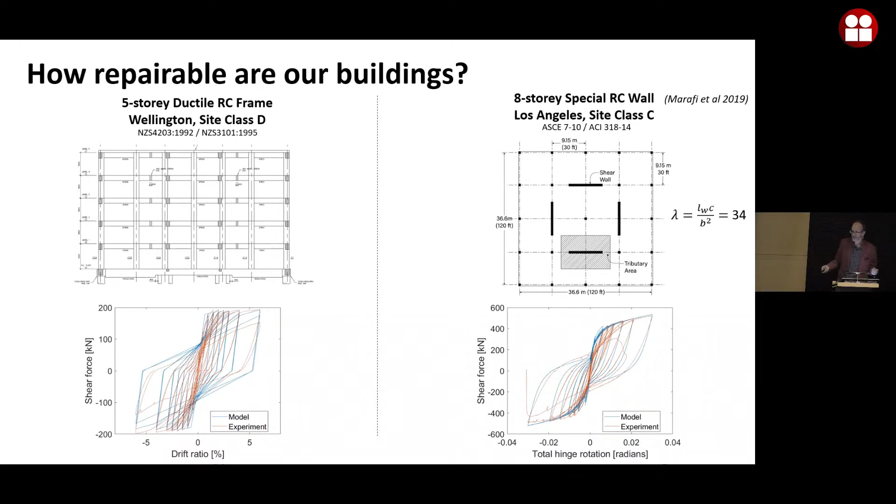We modeled these, and we picked these in part because we had some test data for both of them, so we could develop really good confidence in our models. Any of you graduate students doing nonlinear analysis have probably heard of multiple stripe analysis as a way of assessing performance. We also did a multiple stripe analysis by picking 30 ground motions.

For a 500-year earthquake, 1,000-year earthquake, and a 2,500-year earthquake, we recorded the peak interstory drift and the peak hinge rotation for the wall.

What we found is that if we put on our limits, that 2% and 1.3%, the frame only exceeded that limit at DBE, at our design basis, 25% of the time. Our wall was even better, only 15% of the time. Because this is like a performance-based assessment, I'm pretty happy. I would have been happy with meeting the medians.

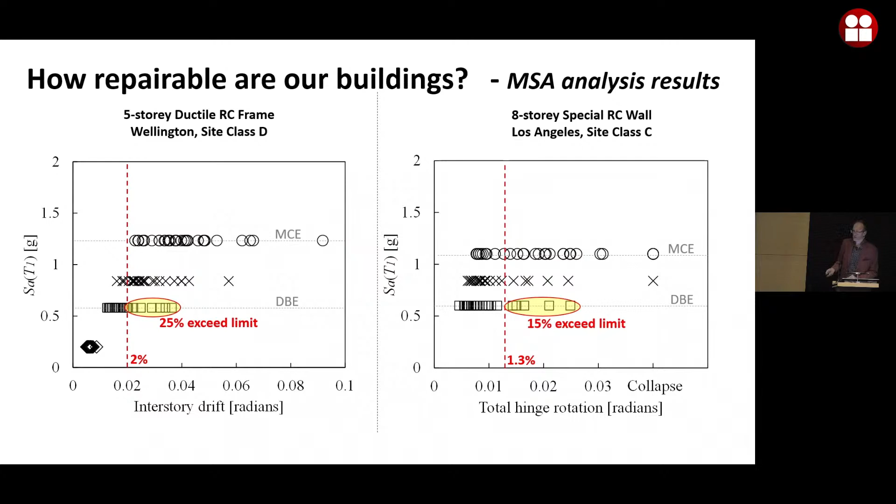So generally, this means that our current designs are really satisfying this repairability limit for the design basis earthquake. Our current designs at the ground shaking we use for design basis are already repairable. So this is not that far away. It's achievable.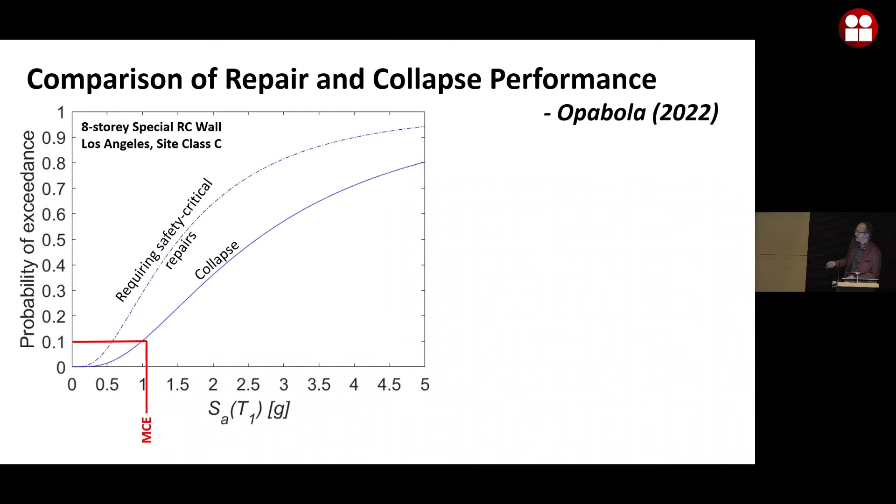If we compare the repairability performance and the collapse performance, shown for that wall building, we can get that from the results I just showed you. We can get a fragility curve that shows when we require safety critical repair and collapse. What's interesting is that the building meets that 10% probability of collapse in the MCE, which is the target in the US codes. But that same building also has a 10% probability of requiring safety critical repairs in the DBE.

So that seems to suggest that if we were to design for a 10% probability of requiring safety critical repairs in the DBE, maybe we would get the collapse performance we're looking for free. We could design specifically for that repairability performance. We need further study to see whether this holds for more building archetypes, but if it does, that is quite promising in my mind.

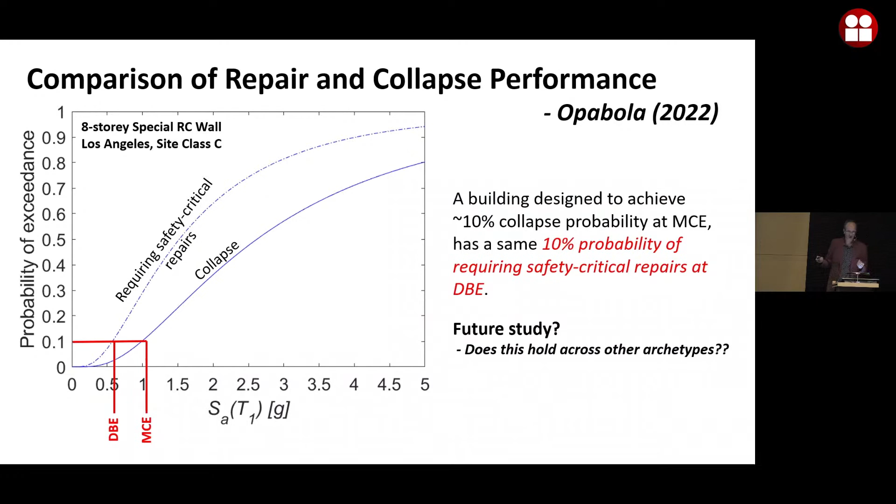One of the reasons why that's really promising is it acknowledges the uncertainty in predicting collapse. Collapse is defined in our performance-based design approaches by whether or not components reach some limit way out here, some DU value. What I'm suggesting is that maybe we should be targeting this value up here, but target it in the DBE, in the design basis, instead of in the MCE for collapse.

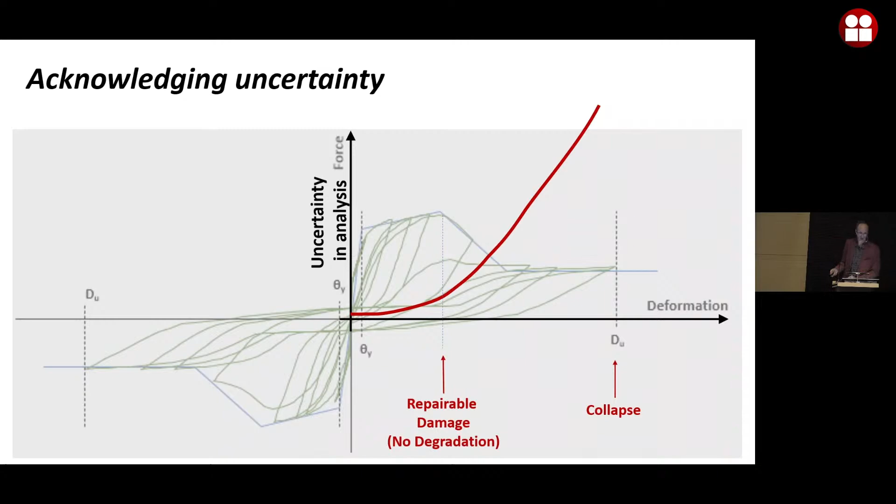That's really nice when we think about the uncertainty in our analysis in reaching these states. The uncertainty in analysis goes way up once we get past this peak, once the components start degrading. By the time we're looking at collapse, our uncertainty in our analysis is large. So should we really be basing our designs at that level? It feels to me like basing our designs back here at this repairable damage level seems more tangible.

And we get more benefits. We get benefits for climate change. This is a plot showing different levels of carbon, or carbon equivalents, due to a design level ground motion. You can see here the scale goes up to about 300,000, and I've extended the scale way out to 2 million, because this curve goes way out to 2 million. What I'm showing on the y-axis is the probability of exceeding those different carbon levels.

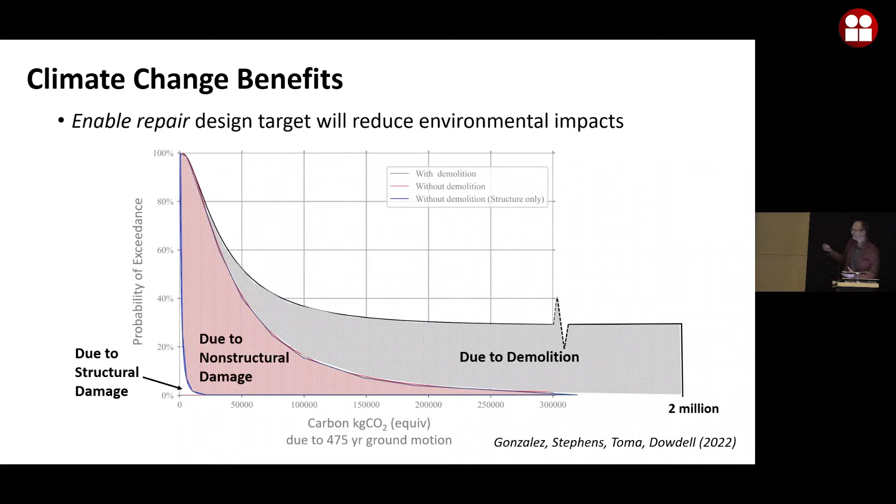This black curve here is all that carbon due to demolition. Essentially, the probability of having demolition of a building after that design level earthquake results in a massive amount of carbon. If we can reduce that probability of demolition by designing for repairability, then we're really left with the damage due to non-structural components that contributes to that carbon impact. You're only left with this tiny sliver back here that's due to structural damage, as long as you have removed this impact from the demolition. So we could get some really big benefits from a climate change perspective by designing for repairability.

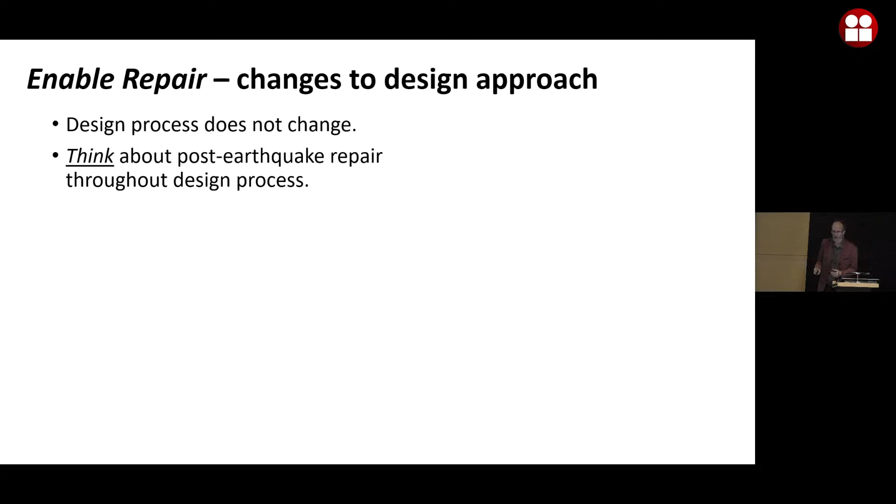So what kind of changes does this have on our design approach if we go for enabling repair? Really, the design process doesn't change. But what does change is it forces the engineer to think about post-earthquake repair throughout the design process. This is really important when thinking about the non-structural components installed in the building.

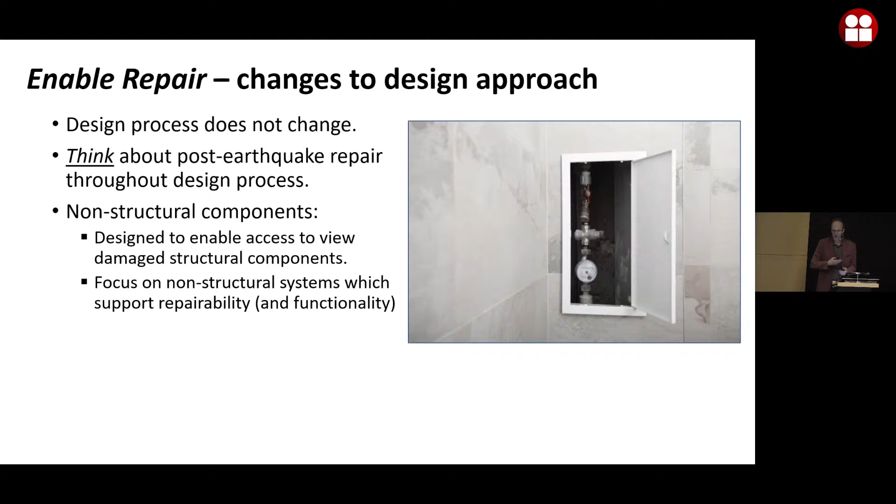In fact, we sometimes install non-structural components such that we can access important piping facilities within the building. Why shouldn't we have these kind of hatches so that we could access the structural components, so we could observe to see the damage state of those components after the earthquake to enable repair? So that's maybe one change that could be made to non-structural systems. But also, it would force us to think about non-structural systems that support repairability, and in so doing, support functionality and better continued functionality.

Okay, last slide, or last couple of slides. I'm just going to pull all these different pieces together that we've talked about into a design framework. So we've talked about SLS, the serviceability, continued function. We've talked about protect life, ultimate limit state, and we've talked about enable repair.

And I'm going to go through and put these on this chart here, and then think about whether I've met the objectives of the talk that I sort of laid out at the beginning. One was to recognize the inherent uncertainties in the seismic performance. And we did that by setting a risk target for each one of these, okay? And so all of them are defined in terms of probabilities.

But we also wanted our implementation to be simple, and defining our design in terms of probabilities is not simple. So we needed to extract from that a design target, and we did that. We just extracted a design target for each one of these across the board. Okay?

And these are actually very similar to what we do currently in New Zealand. And I recognize that in many parts of the world where there is not a serviceability limit state, that adding this is an additional complexity. And where deformations are not checked in the analysis, that's an additional complexity. But for New Zealand, these are actually already done in our design process. So there isn't that much more complexity.

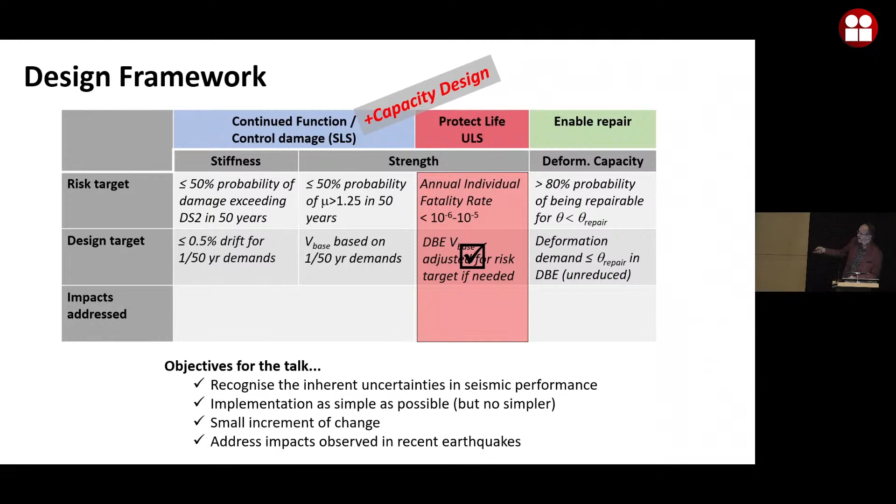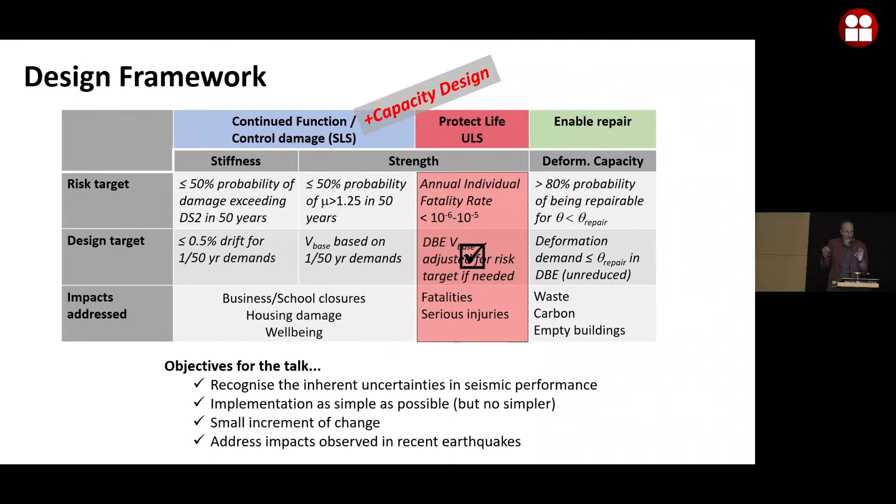Okay? But all of this has been done to try to manage those impacts that we observed from the Christchurch earthquake. Okay? And while it's very difficult, incredibly challenging to trace back, if we were to implement this, how would these reduce? Too much uncertainty there, I think. But certainly, we have built these with these impacts in mind. So I believe that implementing this process will help to manage these impacts in future earthquakes.

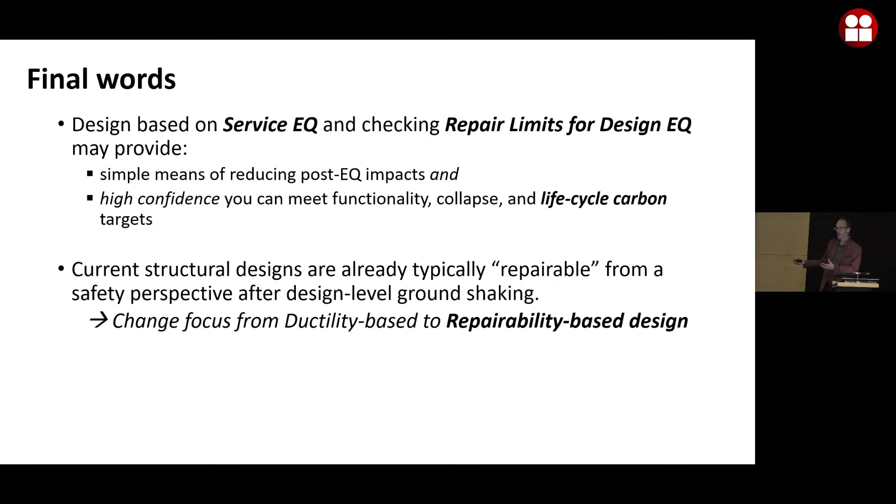So finally, I feel like what I've tried to illustrate for you here is that if we do a design based on a service level earthquake, while checking repair limits under a design level earthquake, it can provide a simple way of reducing our post-earthquake impacts and give us a high confidence that we're going to meet functionality and our collapse targets and even life cycle carbon targets. And we've seen that current designs are not really all that far off of being repairable already. And so it feels like it's time to start to change our focus from the ductility-based design that we've been using very successfully, I might add, but we've been using for 40-some years, and move towards more of a repairability-based design. With that, thank you very much.

Yeah. I don't see any. This is too high tech. In the meantime, any questions?

Hi, thank you for the presentation. It's playing.

You mentioned earlier that in New Zealand there's very strong winds very commonly. I was wondering if that's combined with an earthquake, would that have an extra effect? Or is there done like research about that there, that when they get combined?

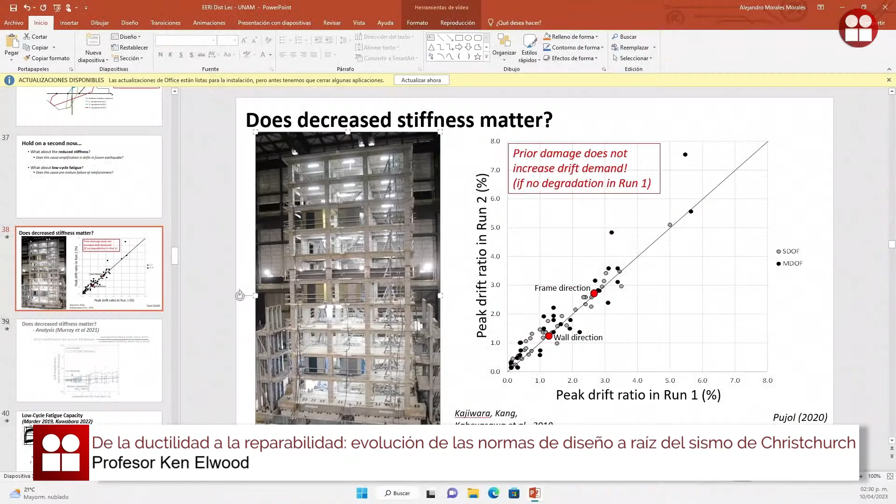So it is just a video of a building shaking. Me doing this is really just as good. As I said, I would play it again twice just to illustrate that the second time the building shook, the behavior was basically exactly the same as the first time. You would not have been able to tell the difference if I played two different videos.

Thank you very much for this great presentation.

Repairability maybe easier if we use some devices like dissipation devices and seismic isolation. How often are these kind of technologies used in New Zealand? More and more, they are being used. But one of the objectives I had here was to show that even your conventional buildings can be repairable. Because my sense is that we don't achieve the widespread community impacts unless we influence the majority of buildings. And while there is an increase in the number of buildings using dissipation devices or base isolation, other forms of protective systems, it's still a relatively small percentage of the overall building inventory that's constructed. So for me, it was really important to see whether or not we could demonstrate the ability for conventional structures to be repairable. Thank you.

Thank you, Dr. Ken. Those results, are they suitable for buildings with a useful life greater than 50 years?